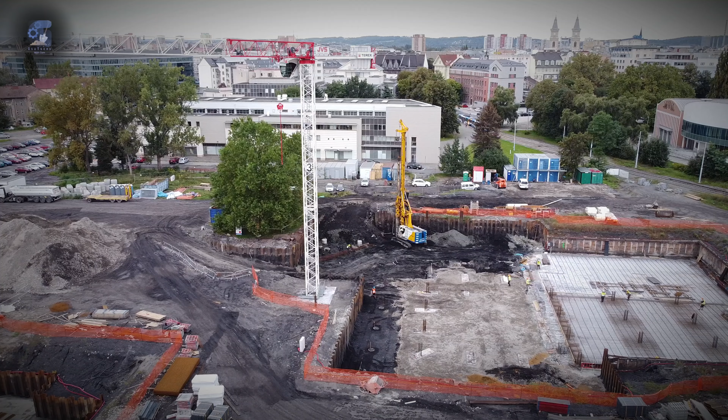It's been more than a century since the foundation collapse of the Transcona grain elevator, a legendary case in geotechnical engineering history. It's a fascinating case, and rightfully so, because of how it contributed to our approach in understanding and applying previously developed soil mechanics theory into the way we design foundations, or at least what we design for. It's a well documented collapse that you can find in soil mechanics textbooks and scientific publications.

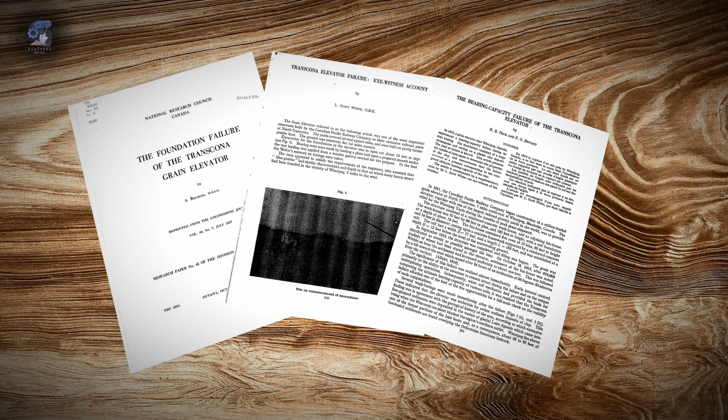So, what happened and what did we learn from the collapse of the Transcona grain elevator?

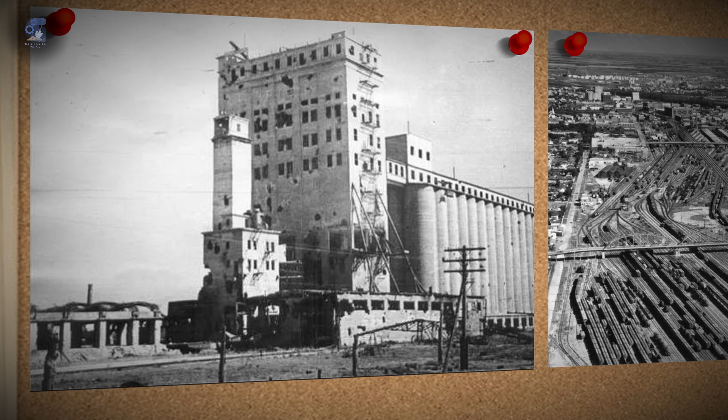At the turn of the 20th century, Canada saw a huge uptake in wheat production, which resulted in serious congestion in the Winnipeg railroad yards during peak periods of grain movement. Construction therefore started in 1911 on the Transcona elevator in conjunction with one of the world's largest railroad yards at the time to facilitate the rapid grain movement.

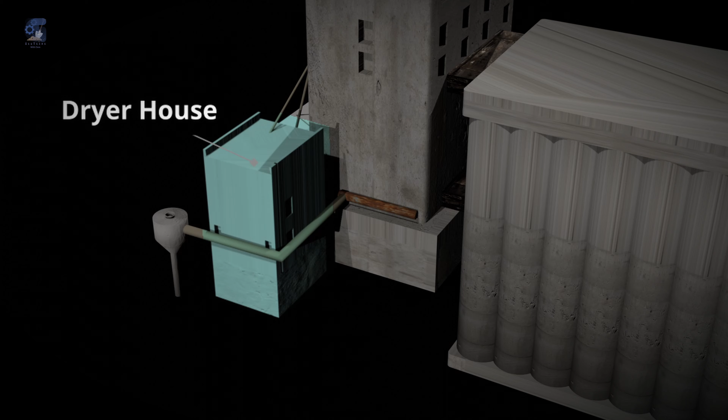The entire structure consisted of a reinforced concrete dryer house, a 16-story workhouse, and a 10-story bin house. The 65 silos of the bin house were founded by a reinforced concrete raft foundation founded on cohesive clay soil. The bin house had a total volume capacity of 35,000 cubic meters.

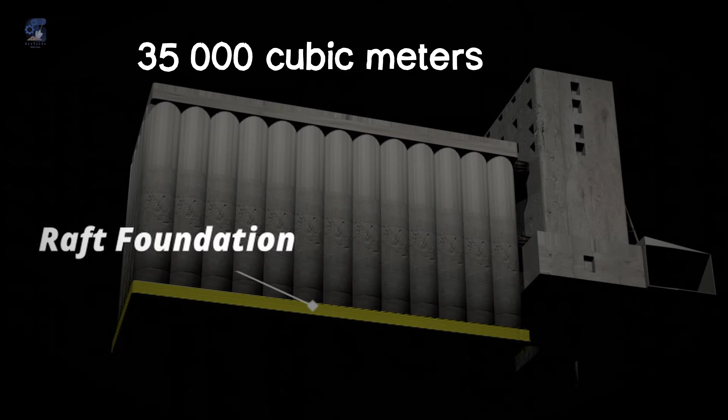On October 18, 1913, during the transfer of grain into the newly constructed 35 million liter elevator, the bin house began to settle and tilt to the west.

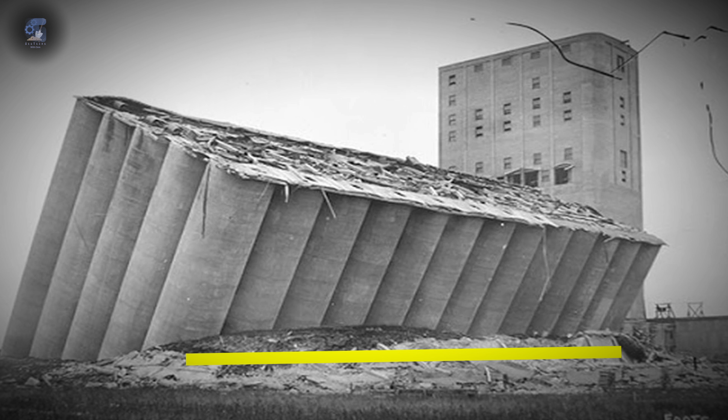Within 24 hours, the structure had tilted 27 degrees from vertical, and the western edge of the foundation had sunk 7.3 meters below its original elevation, with the eastern edge rising about 1.5 meters above the ground. Earth mounds as high as 4.6 meters surrounded the structure, having been thrust up as the failure occurred.

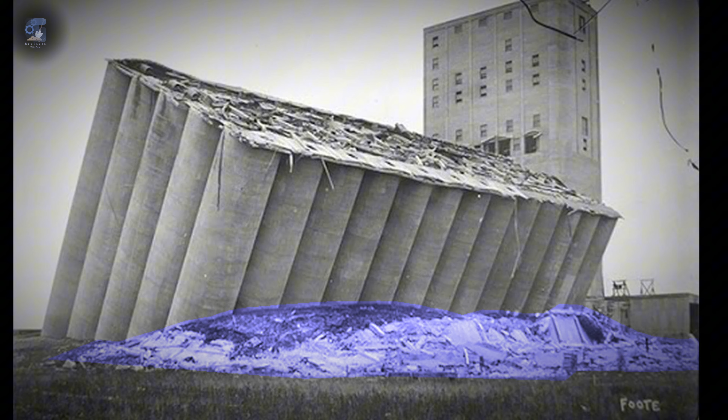The interesting part about this failure is that the structure was entirely intact, which meant it was purely a geotechnical failure. You see, soil bearing capacity theory is relatively well understood by today's geotechnical engineers, and we have more sophisticated foundation analysis tools at our disposal, allowing us to carry out advanced analysis.

This was not the case during the early 1900s when the Transcona elevator was designed and built. At the time, local experience was relied upon to design foundations. The first comprehensive total stress bearing capacity theory would be proposed around mid-century by Terzaghi.

So, to really understand what caused the failure, let us take a step back and take a closer look at the soil material that the structure was founded on.

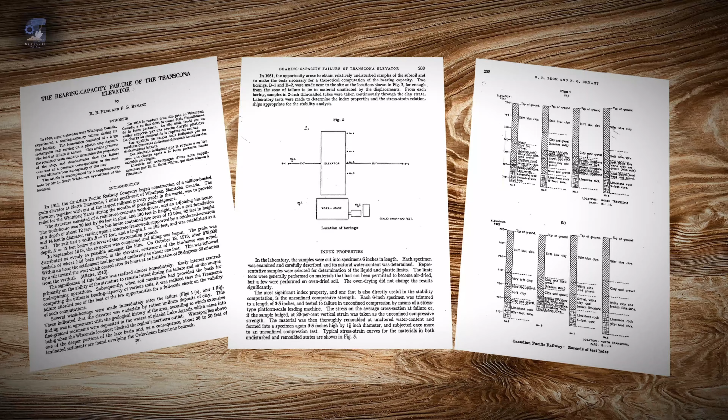You see, the significance of the failure did not escape early foundation engineers who recognized this unique opportunity to compare the loading at failure with that predicted by classical bearing capacity formulas. With that, detailed test boreholes and laboratory testing were carried out between 1951 and 1952.

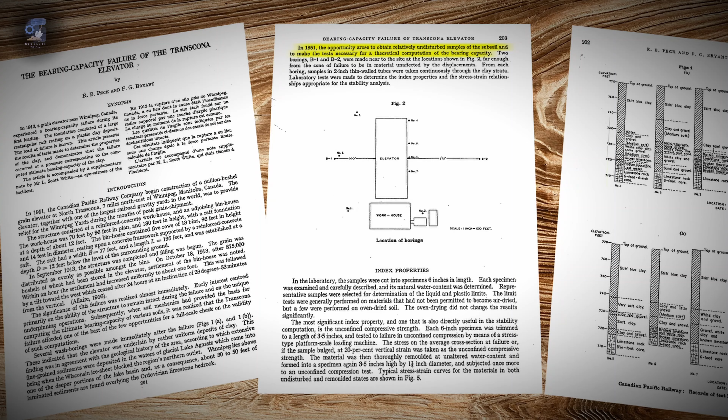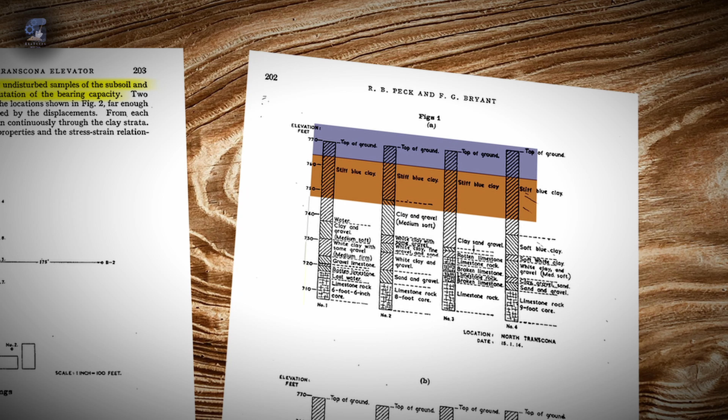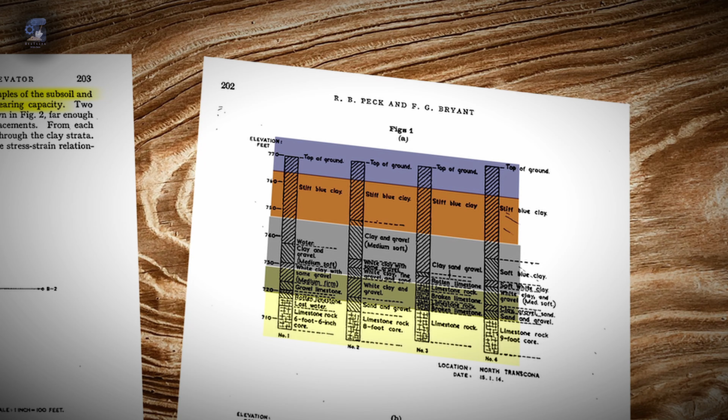Based on the borehole data and lab results, the subsurface profile at the Transcona grain elevator site consisted of clay fill, followed by a layer of stiff brown clay, a highly plastic gray clay layer, a glacial silt layer, and finally, a highly fractured and water bearing limestone bedrock. These deposits were formed in the post-glacial Lake Agassiz era as the glacial ice retreated up north.

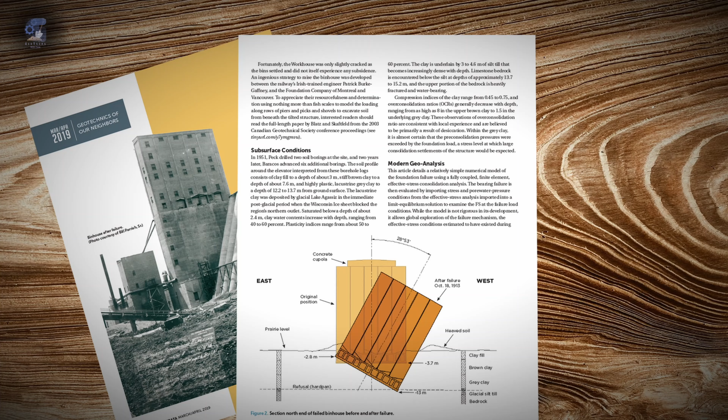The compression index of the layers ranged between 0.45 and 0.75, suggesting moderate to highly compressible soil. Compression index is a fundamental parameter in soil mechanics that quantifies how a soil compresses under increased effective stress during primary consolidation, or the rate at which the voids in the soil sample decreases with an increase in pressure.

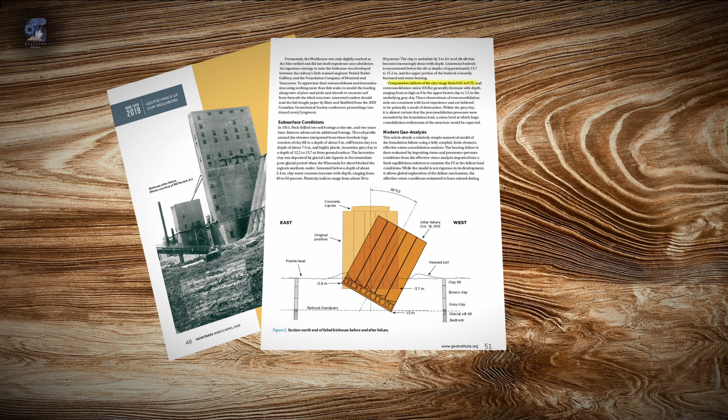The overconsolidation ratio ranged between 1.5 and 8. In soil mechanics, overconsolidation ratio is a key parameter that describes the stress history of a soil. Soils are subjected to various load and unloading conditions over time, which affects their mechanical behavior. The overconsolidation ratio is derived from dividing the maximum past effective vertical stress by the current effective vertical stress at a point.

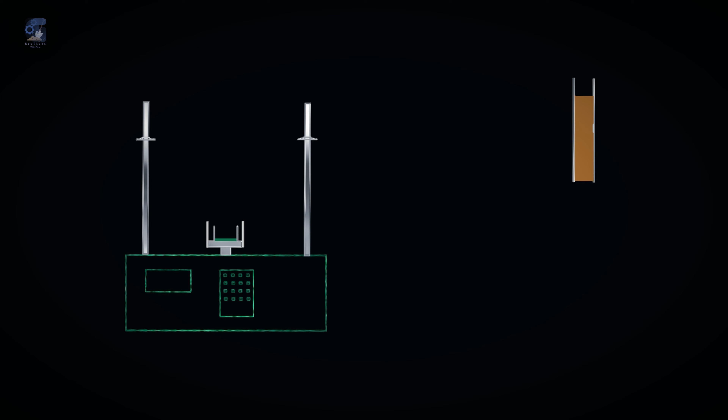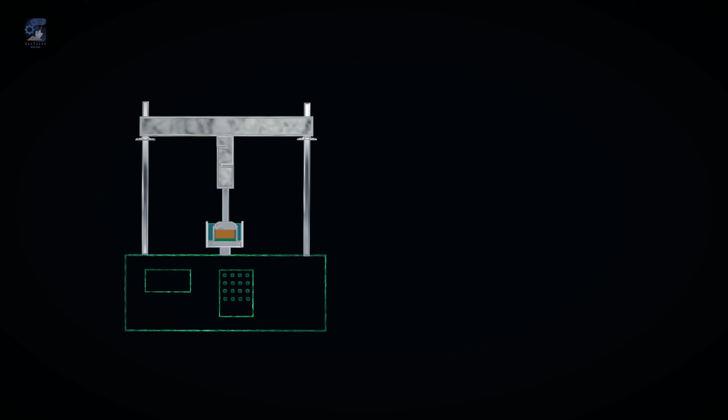To achieve this, an oedometer test is conducted on an undisturbed soil sample. The oedometer test, or one-dimensional consolidation test, is a procedural test in which the sample is subjected to an increasing load and a displacement load curve is plotted.

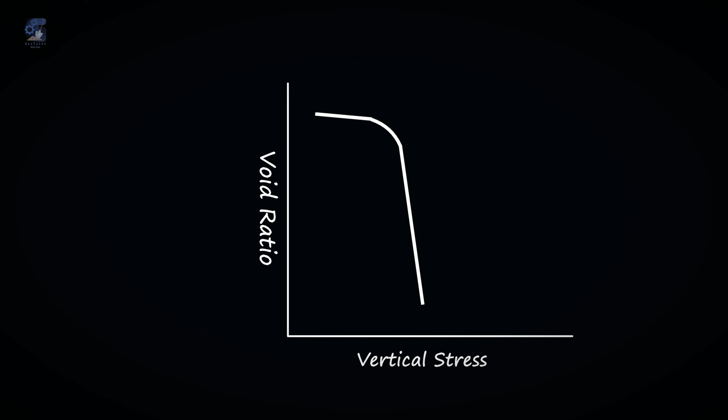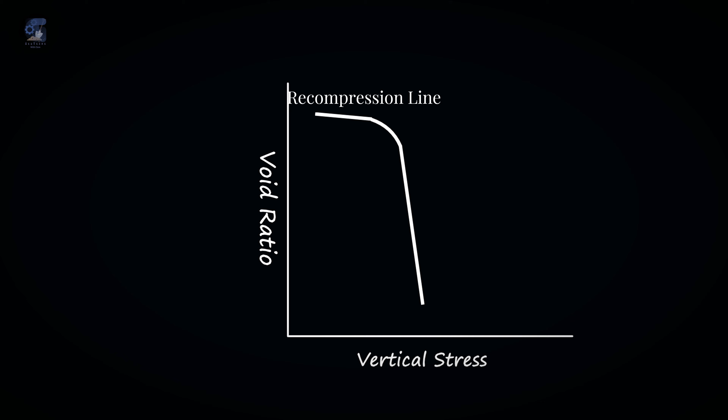The curve consists of a flatter portion, an inflection point, and a steeper straight line. The flat part, or the recompression line, represents the pressure that the soil has experienced in the past.

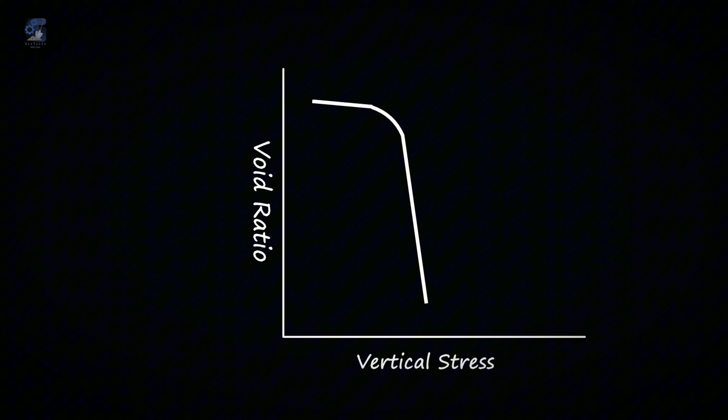In the early 1930s, Arthur Casagrande developed a visual technique to establish the maximum pressure that the soil has been subjected to in the past. To get this, first we determine the highest point of the curvature on our inflection zone. Then we draw a straight line. We then draw a horizontal line from that same point. Secondly, we bisect the angle created by these two lines.

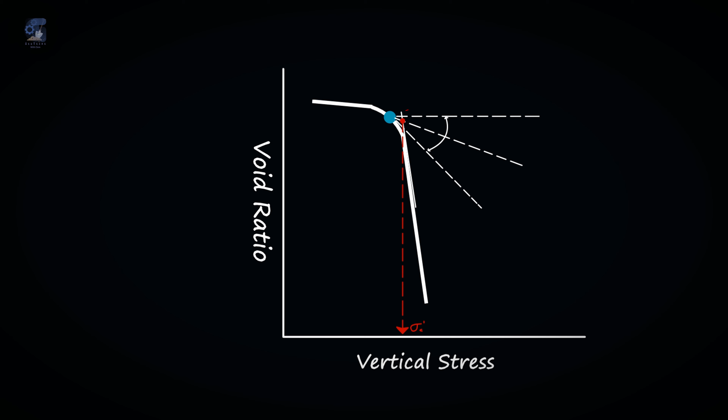Finally, we draw a straight line along the straight portion of our curve. The estimated pre-consolidation pressure is at the intersection of these two lines. On the other hand, the current effective stress is determined by multiplying the unit weight of the soil and the depth to which the sample was collected.

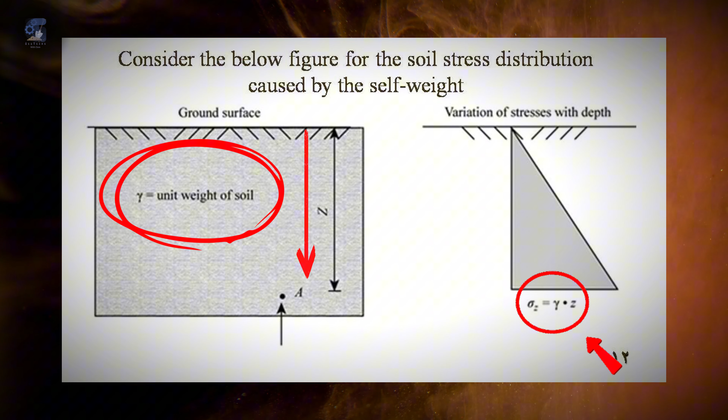With the pre-consolidation pressure and the current effective pressure at the Transcona site determined, the upper brown clay had an overconsolidation ratio as high as 8, and it reduced to 1.5 in the lower gray clay. So here's a widely accepted theory on exactly what happened.

The mat foundation had not been adequately designed to tolerate large settlements. You see, during construction, the engineers had determined that the founding materials were uniform and sufficient to support a fully loaded bin house, using plate load tests, a method which was widely used during that time before the current in-situ test methods were introduced.

These newer methods are capable of evaluating soil strength in deeper strata. The plate load test method is very useful to determine the ultimate carrying capacity of the soil. However, it has a critical shortfall, which proved disastrous in the case of the Transcona grain elevator collapse.

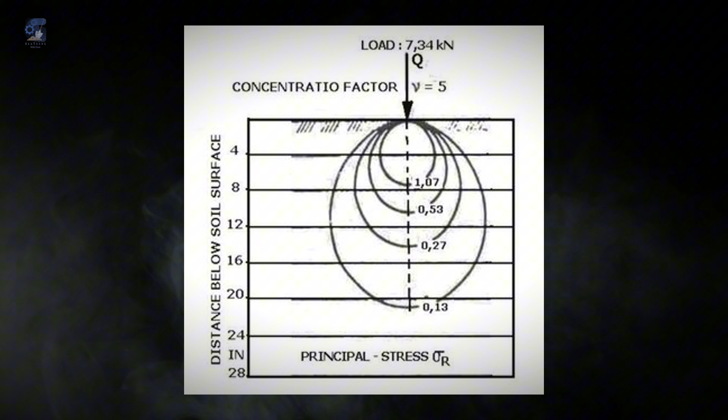To visualize how stress is distributed under the foundation, in 1885, Joseph Valentin Boussinesq developed the concept of the stress influence bulb. The analytical solution shows zones of equal stress beneath the foundation. The zones of influence are proportional to the load and the size of the foundation.

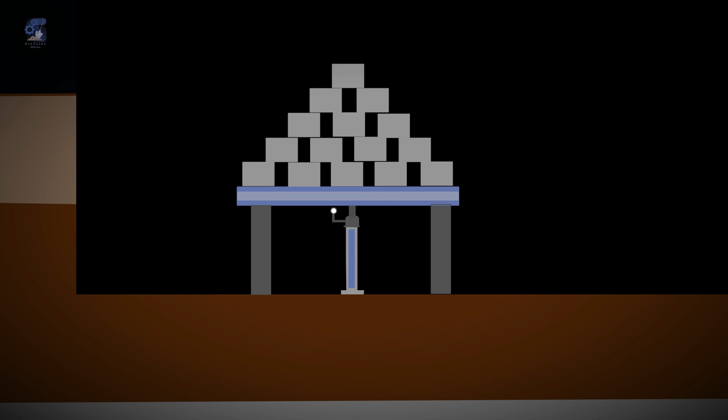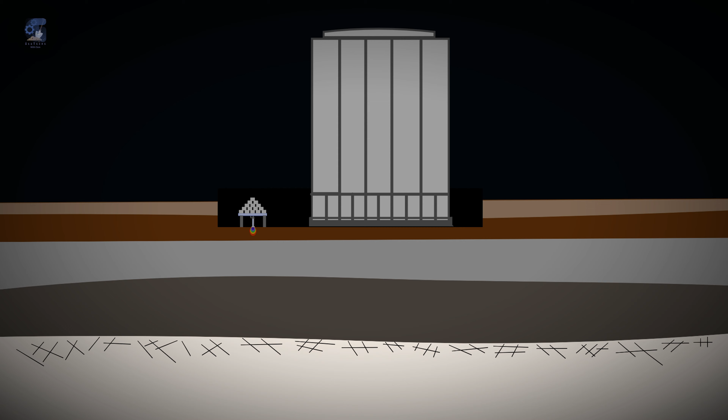So when the engineers used the plate load test, all the stress was distributed in the upper stiff brown clay, and they determined that it was capable of supporting 1.3 times the expected fully loaded bin house. But the stress bulb of the actual bin house extended deeper into the lower gray clay, where the foundation load exceeded the pre-consolidation pressure, triggering the failure.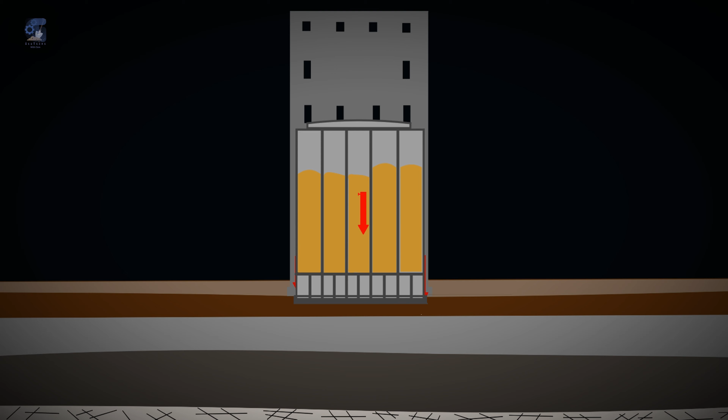In addition, although it was reported that the bins were uniformly filled, the possibility of eccentric loading cannot be overlooked. Even a small shift in the center of mass could have introduced a moment force and caused an uneven load distribution under the mat foundation, initiating the failure on the western side of the bin house.

The failure followed the classical Terzaghi failure plane, as evidenced by the soil mounds thrust up around the collapsed structure.

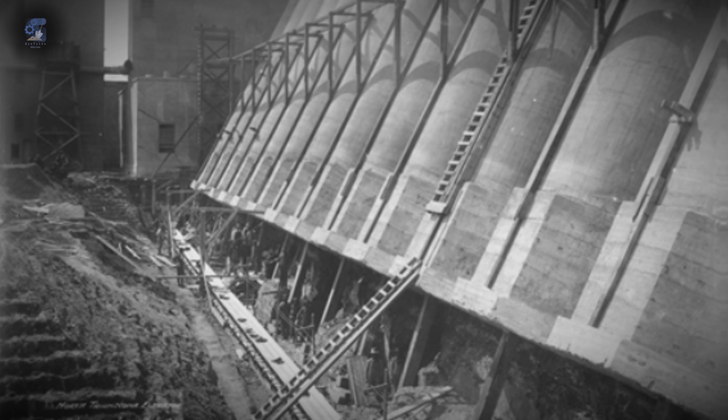Due to fears that the foundation of the workhouse might also collapse, in December 1913, the Foundation Company of Montreal and Vancouver submitted a plan to underpin the workhouse. They sunk piers into bedrock under each building column.

Since the bin house structure was intact, the foundation company convinced CP Rail that it was possible to salvage the bin house by righting it and underpinning the structure once the vertical position had been reached. This was a daring proposition for its time, considering how heavy the bin house was.

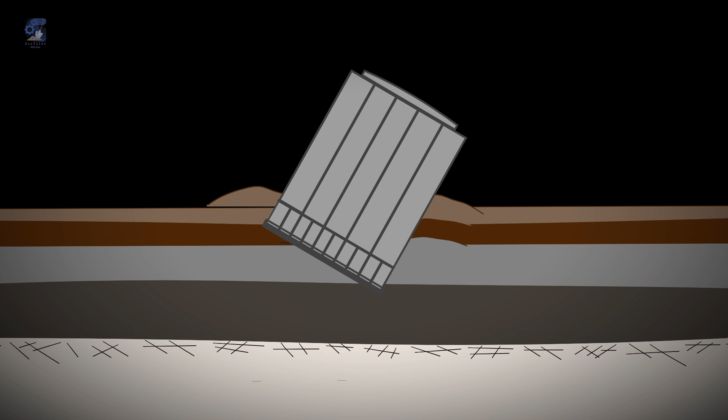Initially, a trench was excavated along the entire east side of the bin house to the underside of the mat foundation. Drifts were excavated beneath the mat foundation, and a row of 14 piers was sunk to bedrock along the west edge of the mat foundation. Wooden rockers were then attached to the top of the piers.

Wooden rockers were attached to the top of the piers. The intent was to support the structure, with these piers acting as a fulcrum about which the structure would be rotated. Shoring timber screws were installed on the western side of the structure.

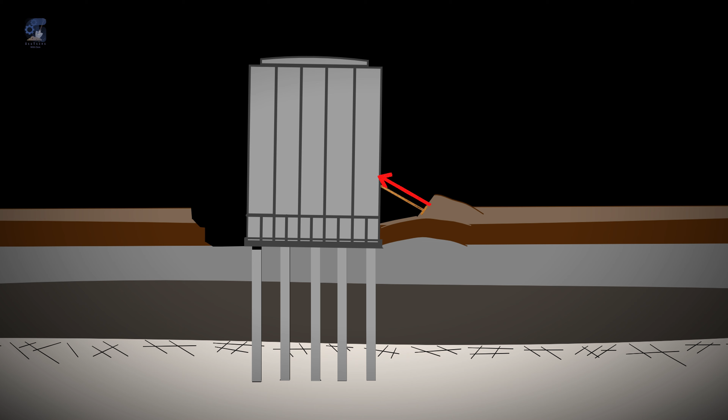These were used to support and push the bin house to the east as the soil under the bin house was being removed. More piers were sunk to bedrock along the drifts, which would support the building once it was in its right position.

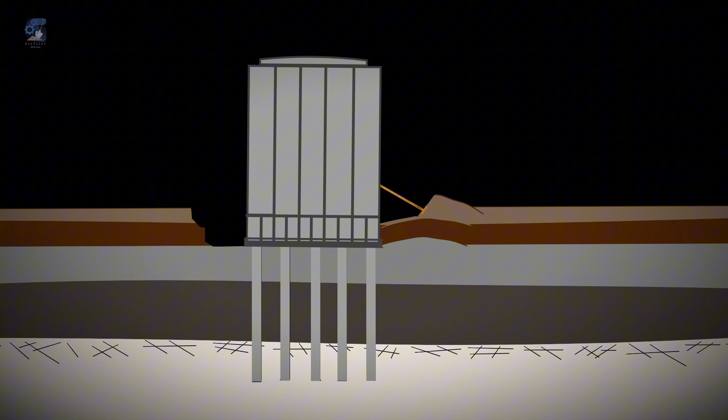On October 17, 1914, the bin house was back in its vertical position, having been raised about 3.7 meters in the process. Though the bin house could not be retained at its original founding depth, this was a highly successful operation that will remain written in the history books.

While today's standard of practice would have easily predicted the outcome, such was not the case in the early 1900s, when an observational approach was often relied upon. It was a time when lack of understanding of soil behavior could be offset by reacting to problems with ingenuity and determination.

A study published in 2019 to replicate the failure using a coupled analysis concluded that the failure could have been avoided if the bins had been filled in stages, allowing the pore water pressure in the saturated gray clay to dissipate and consolidate the soil. But hindsight is 2020 — the concepts of staged loading and stress paths would not be recognized until decades later.